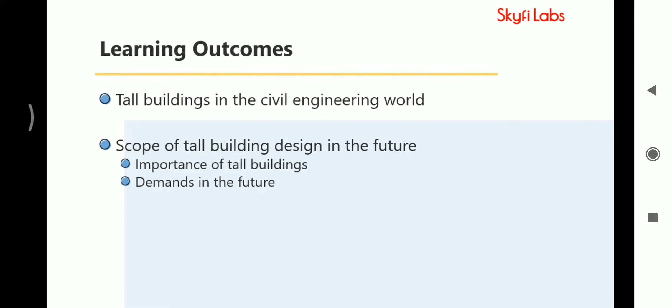In this video, you will learn about tall buildings in the context of civil engineering and the scope of their study. So, let us first start with the basic question: what are tall buildings? Well, there is no absolute definition of what constitutes a tall building. The definition is subjective, considered against one or more of the following categories: relative height, proportion, and structural design.

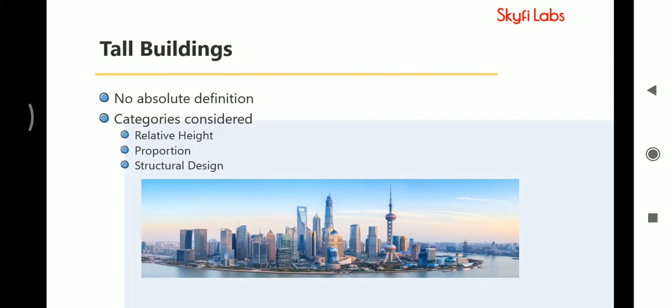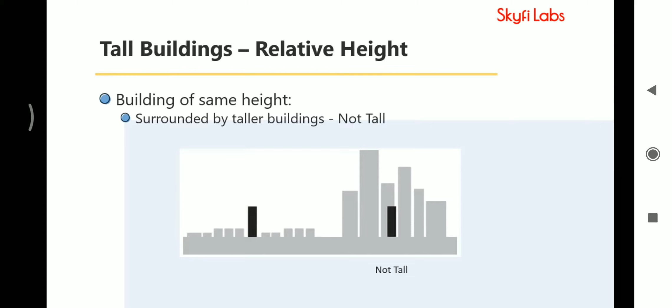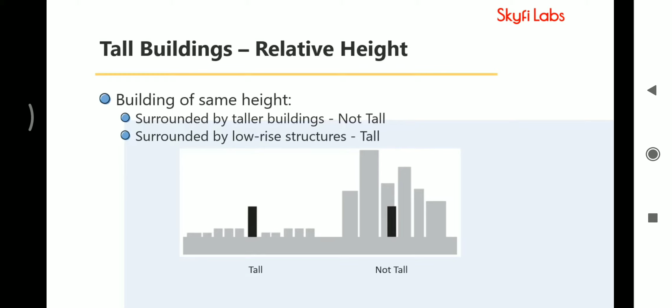Under the relative height category, we call a building tall depending on its height relative to the surrounding structures. For example, a 20-story building may not be considered a tall building in a high-rise city filled with skyscrapers. But in a small town or a suburb, the same building may be distinctly taller than the urban norm, and can thus be called a tall building.

Under the proportion category, we may call the numerous buildings that are not particularly high, but are slender enough to give the appearance of a tall building, tall buildings. On the other hand, there are big buildings with large footprints, which are quite high, but are ruled out of being classed as tall buildings.

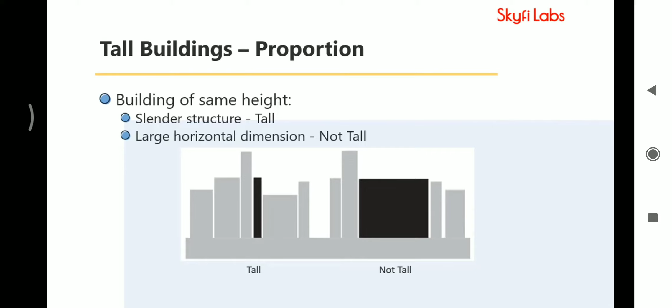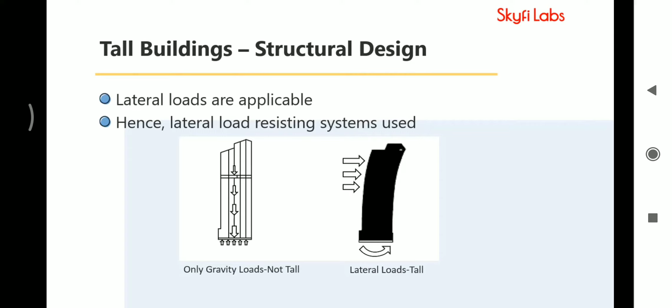Most importantly, from the structural design point of view, those buildings which are subjected to only gravity loads are not considered tall buildings. Only those buildings which are additionally subjected to lateral loads, like wind loads, seismic loads, etc., are referred to as tall buildings.

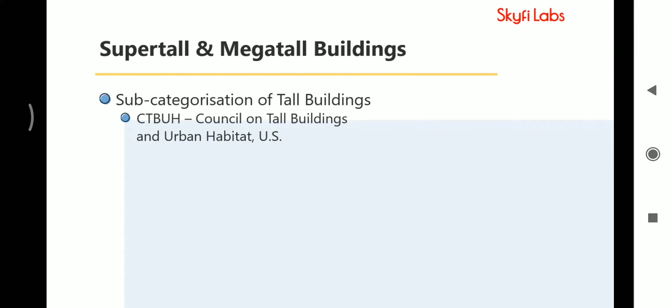The Council on Tall Buildings and Urban Habitat, an international body in the field of tall buildings and sustainable urban design, further provides two subcategories for tall buildings. Buildings more than 300 meters high are called super tall, and those more than 600 are called mega tall structures.

Let's take a look at some of the special characteristics of tall buildings. A tall building may be of single function or mixed use. A single function tall building is defined as one where 85% or more of its total floor area is dedicated to a single function. A mixed-use tall building contains two or more functions, where each of the functions occupies a significant proportion of the tower's total space.

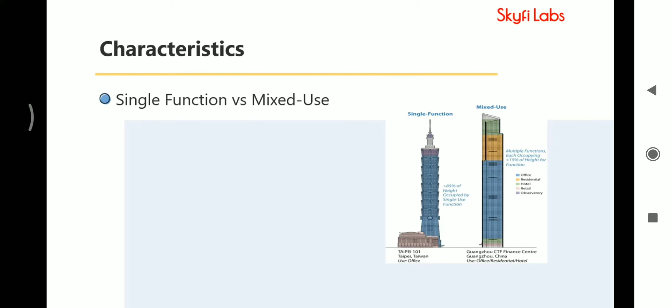Consider the example where the Taipei 101, having more than 85% of its height used for office, is a single-use building. On the other hand, the Guangzhou CTF Finance Centre, which has multiple functions, with each function occupying at least 15% of the building height, is a multi-use building.

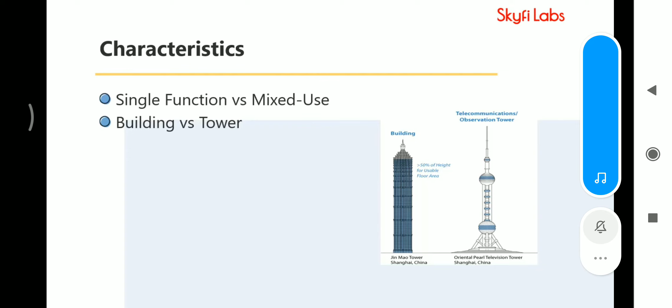A tall structure may be a building or a tower, depending on its usage. For a structure to be called a building, at least 50% of its height should have usable floor area where humans can occupy themselves; otherwise it is a tower. A building is a co-joined building when 50% or more of the total building height is connected to other buildings.

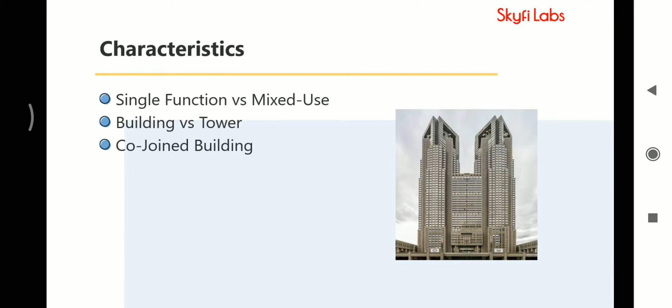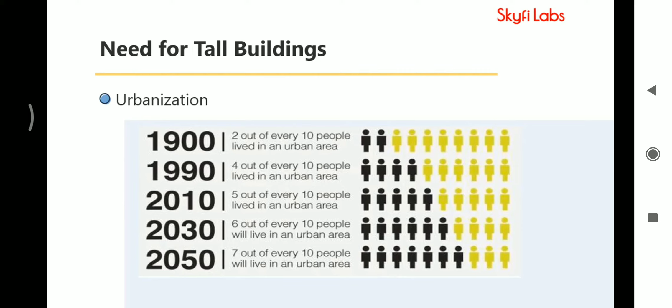You must be wondering why you need to study tall buildings as a civil engineer. Well, as the infographic shows, the number of people living in urban areas has been increasing rapidly in the past decades. It has been estimated that, by 2050, 7 out of 10 people will be living in an urban area. This clearly explains that the buildings to be constructed for this increasing population have to be made taller vertically, due to the restricted space in the urban centers.

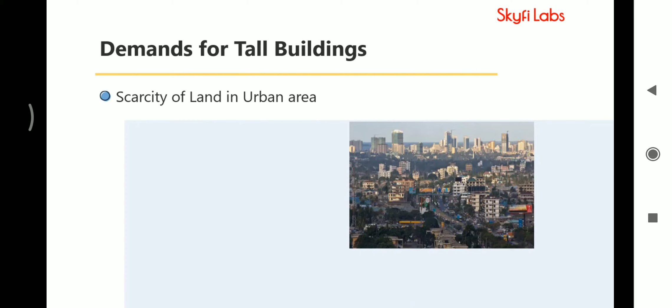The demands for tall buildings in the coming future can be summarized in these points. Scarcity of land in urban areas means the buildings have to be made taller to accommodate more people in the same land area. This scarcity is coupled with the increasing demand for business and residential spaces.

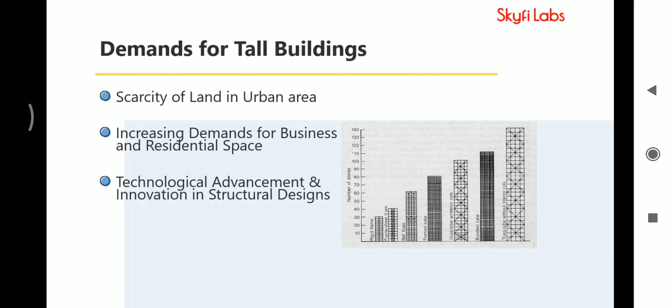Technological advancements and innovations in structural and material designs, from load-bearing walls to framed structures to newer technologies, have helped in constructing taller and taller buildings with lesser but stronger materials. Some countries have constructed some of the tallest buildings in the world to uplift their cultural significance and prestige. The urge of human beings to push beyond their limits has helped them to go for taller structures.

Now that you have a basic overview of what tall buildings are, in the next video, you will learn about the design of tall buildings.